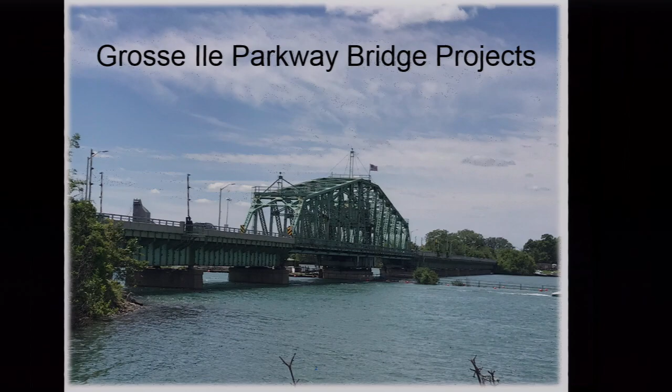So let's go right into Miss Watts' presentation. There is our bridge, the Grosse Ile Parkway Bridge, the Swing Bridge, the Free Bridge, County Bridge 382, our bridge, looking much like it has since it was opened in 1932.

So here is Beverly Watts. We're in constant communication—she is working hard, and she's got a good staff. You can read her statement as well as I can: trying to get this done as seamlessly, as quickly, and as safely as possible.

So we'll go through the slides of the purpose. Obviously background, information on the Parkway Bridge over the Trenton Channel and the Grosse Ile Parkway Bridge over West River Road—both are going to be undergoing repair. Overview of both projects and the scope of the work, and discussion of bridge project timelines and what the next steps will be.

So here's your background: Grosse Ile Parkway Bridge, 90 years old, essentially opened as a vehicular traffic bridge in 1932. Most of you know previously it was a railroad bridge built by the Canada Southern Railroad Bridge Company, an offshoot of the Canada Southern Railroad, built in 1873. So some of the bridge's footings are from 1873—it's been there quite a while. Original expectancy was 50 years; obviously we've outlived that.

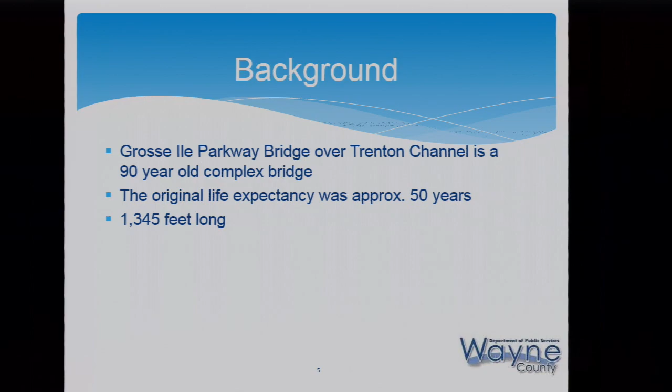And it's just over a quarter-mile long, currently listed poor by National Bridge Inspection Standards. Repairs were done in November—we all remember that. Some of the steel beam plates, the floor beams, were reinforced. Some, I believe, were replaced, and some were reinforced to get the bridge back open again.

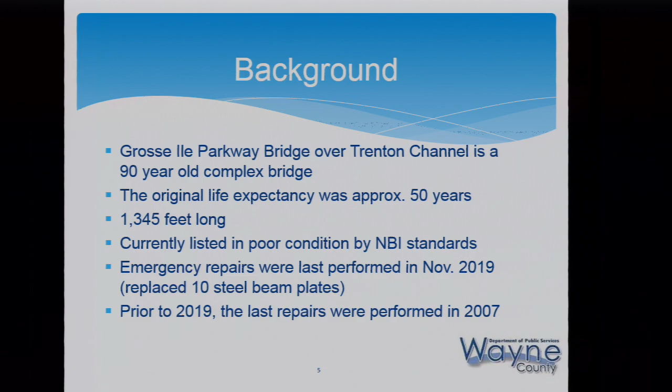And the last repairs—many of us remember—it was closed from May through December in 2007, where much of the decking was replaced. So, scope of the work.

Two phases: the structural steel rehabilitation, that contract's been let. The contractor is already starting fabrication and acquiring materials. And then the last is a future phase, the bridge foundation repair.

Half of the bridge foundation piers were original to the railroad bridge—what we call the even-numbered ones. The ones you can see that depress a little bit as you cross the bridge have been there since 1873; they have settled a bit. The ones the county put in when it was converted to a vehicle bridge went down to bedrock—those have not budged.

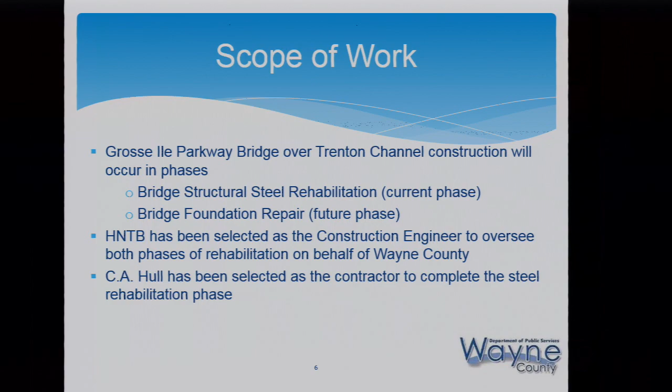So HNTB—there's going to be a lot of initials here—is the construction engineer overseeing both phases, the steel and the piers, working for the county. And CA Hull, one of the best bridge engineering companies in the world, is the contractor to complete the steel rehabilitation phase.

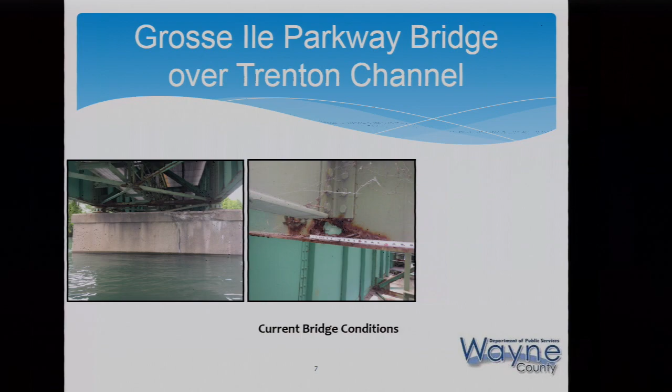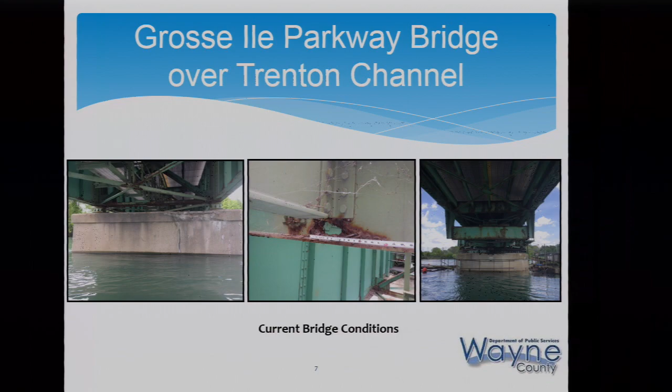So there'll be some pictures here of current bridge conditions, the Parkway Bridge, the swing bridge over the Trenton Channel. This picture shows one of the piers—see a little deterioration of the pier. The next pictures show the corrosion that's happening; that's a floor beam where it intersects the side girders. And this is a view of the pedestal where the bridge's swing portion actually articulates upon—that is Pier 9. Some more pictures.

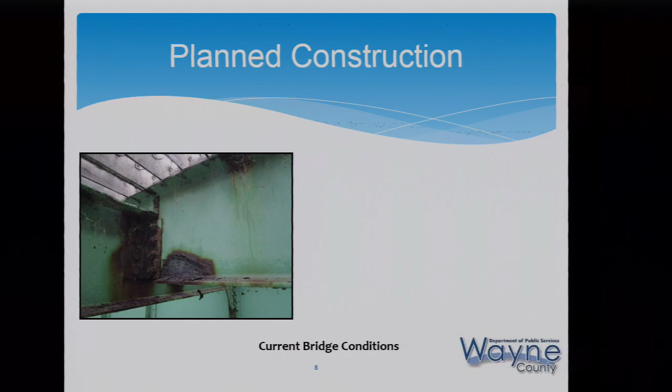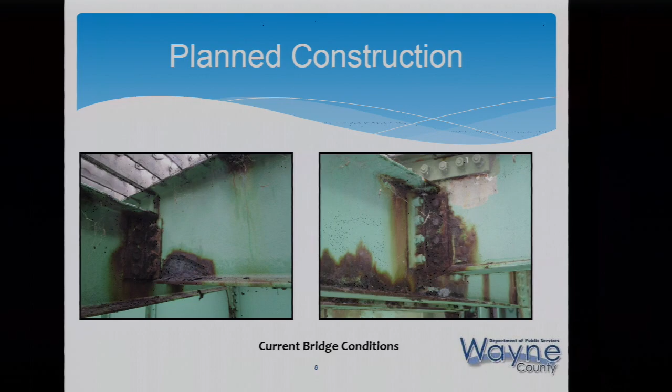You can see corrosion where this stringer beam is bolted to a floor beam. You can see the decking above and the corrosion that's occurred over the years. Another picture, very similar. Again, this is a stringer bolted to a floor beam.

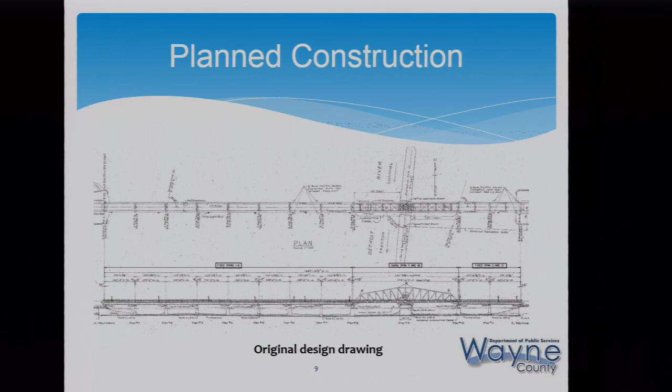The bridge was entirely a truss bridge with half the piers it has now. When it was converted to a vehicle bridge, the trusses were removed, but the piers had to be doubled. The ones the county put in during 1930-31 go down to bedrock. The original railroad piers are not quite that substantial, so there will be work done on that.

Now the good stuff, the timeline. This is probably the most important part to most of us. The structural steel rehabilitation phase, we'll go through that first. And there's your time, starting with the bid letting in January through anticipated reopening in December of 2020. Right now the contractor is assembling materials, doing some prefabrication, and getting ready to start mobilizing.

We'll step down to the foundation rehabilitation phase, the piers—actually the even-numbered piers that will need rehabilitation. There's the timeline on that. That work should be going on. The goal is to get that work going concurrently while they're doing the steel from above. There will be pier reinforcement work going on below.

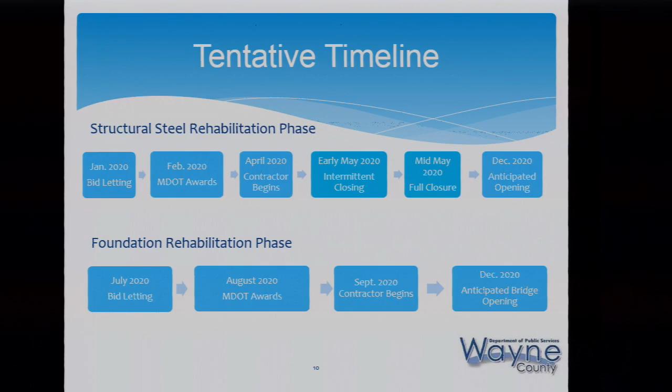That's the county's goal. The next portion, the West River Road overpass—there's the bridge, some background information on that. It doesn't look like that now. So again, we'll start with the background.

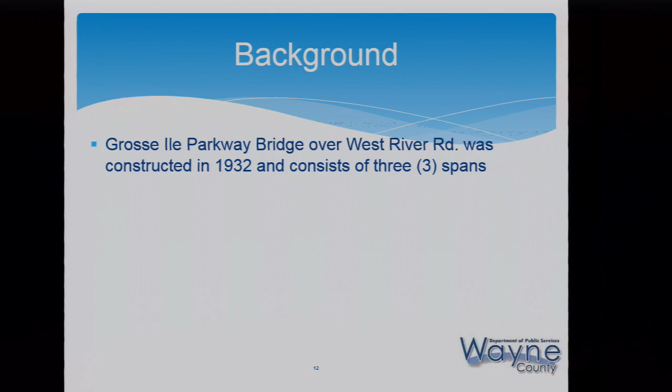Parkway Bridge over West River Road was constructed in 1932. When the rail bridge was removed, a vehicular bridge replaced it. So this bridge has been in place since 1932. As many of the bridges in the township are, it's a Works Progress Administration project from that Depression era, where a lot of the infrastructure in this country was built. We still have bridges remaining from that. It's 95 feet long, 35 wide.

Repairs were done in 1995, and you can read as well as I can: substructure to span in the middle, replace the deck and the railings. The railings used to be a good deal more ornate, as were most of the projects from the Depression era.

As we all know, two temporary steel supports were placed beneath span number 2 to compensate for the deterioration. I was under there with Kevin Gunn, and he pointed out where there were problems with the dapped end Bridge. He was adamant that those steel supports had to stay, and please don't anybody touch them.

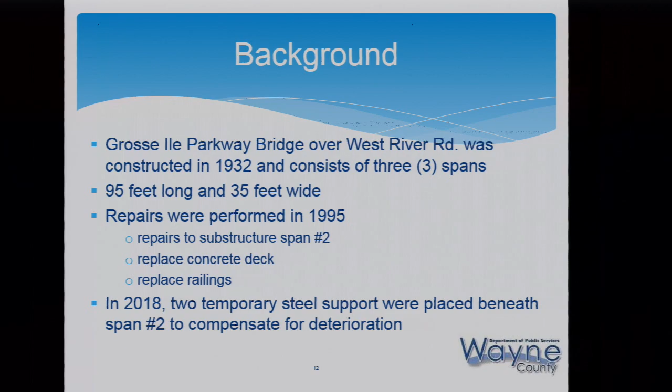Which is why we've blocked it off to vehicular traffic. They did not want any chance of vehicle contact with those supports, or they would have to close the bridge completely.

Again, scope of work coordinated with the rehab of the Grosse Ile Bridge over the Trenton Channel. Obviously it makes perfect sense to all of us—if you're going to have the steel portion of the bridge over the Trenton Channel worked on, let's get them both fixed at the same time. It doesn't do us any good to fix the span over the channel but have the West River Road overpass closed. So they're going to be run concurrently.

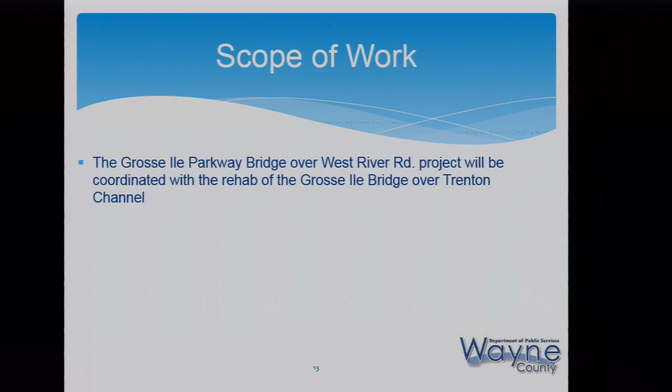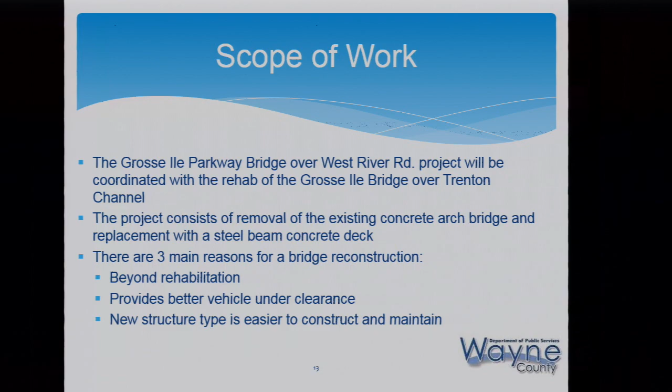They'll be removing the existing concrete arch bridge and replacing it with a steel beam concrete deck. Three main reasons: the existing bridge was deemed beyond rehabilitation, the steel beam will have better vehicle clearance—you won't have vehicles stuck under there like I've seen—you'll have a more consistent clearance, and it's easier to construct and maintain with new techniques.

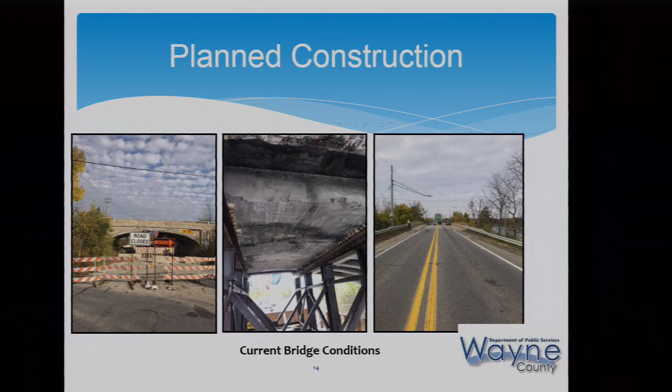So, current bridge conditions and planned construction—that's what we see today. That is what it looks like underneath, and the closer you get, the scarier it gets. And that's just an overhead shot looking westbound towards Trenton.

So they're going to use the same technique as the Lilley Bridge. There is our bridge—you can see some of the separation of the pavement and the changes. Just leave the rest to your imagination. It's going to be a much more modern look, and that's the construction technique they're going to use. That's what our bridge will most likely end up looking like.

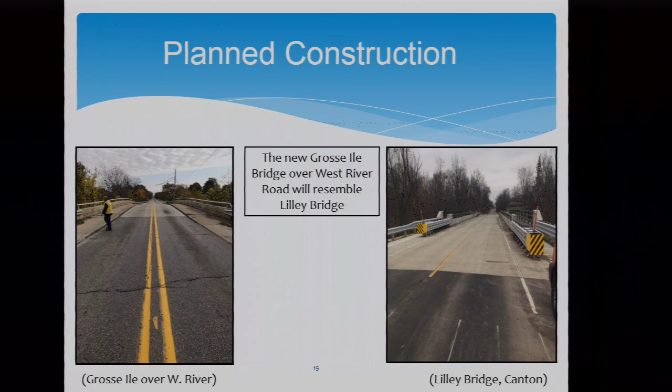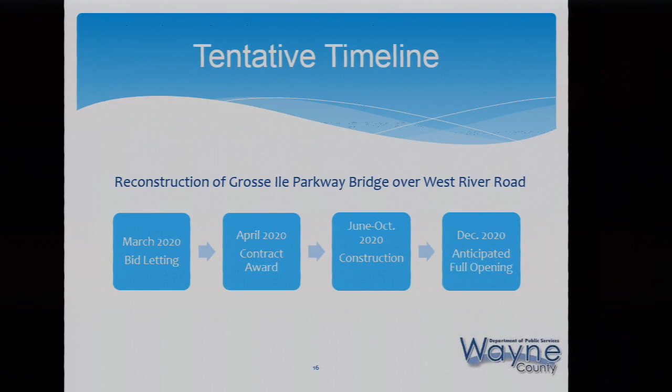So again, the timeline on that bridge—essentially running concurrent with the repairs of the Grosse Ile Parkway Bridge.

Next steps: finalized plans, bid letting for the foundation rehabilitation phase—that's ongoing. Mobilization, April—that is today. This is April 1st.

We're expecting another closure for inspection—the one-day closures, usually on Thursdays from 9 to 3, to get the reach all in, to get the last shots, the elevation shots, the hopefully-lack-of-movement shots, inspection on the old railroad piers, the ones from 1873. That may or may not happen. When we do know if they'll do the inspection, we will of course get that information out on Grosse Ile Connect, so you can plan your day around that.

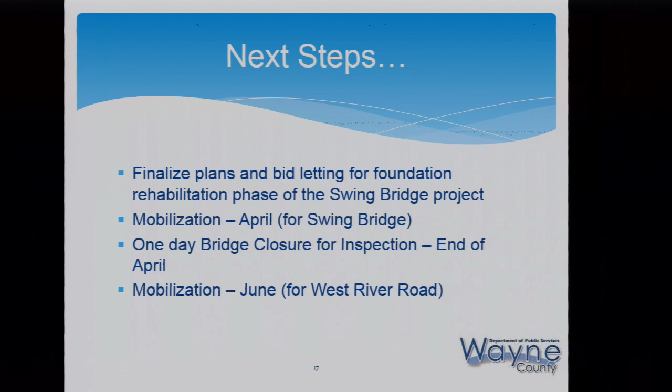And again, mobilization in June for West River Road. The Parkway Bridge will already be closed at that point, so I think that will be irrelevant to most.

And the questions you provided to Grosse Ile Township—as you recall, we opened up an opportunity for email questions, and many of you did offer questions, and they've attempted to answer all of them. I'm going to cycle through them without comment. You can read them, and if you want, you can review this at your leisure and get the answers. So I'll just step through.

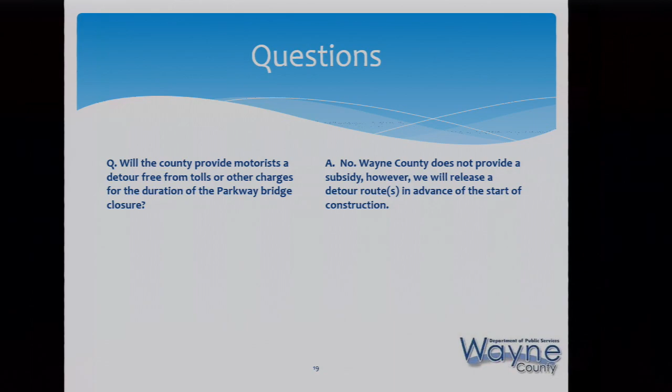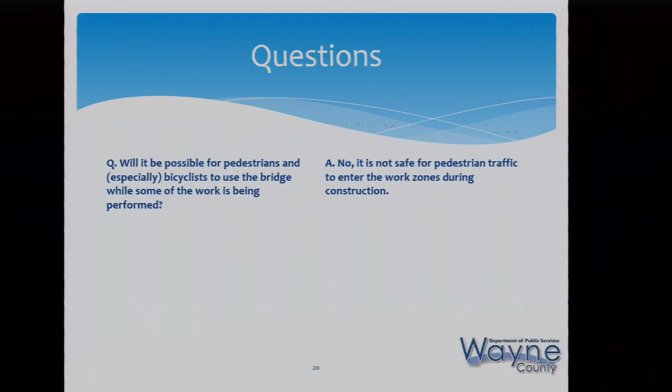By saying it's not safe, once a floor beam comes up, the entire width of the bridge is closed. The deck comes off, the stringers come off, the floor beams come off. It's just a hole, so it's not going to be safe riding a bicycle or walking across that.

This has been an interesting concern. The bridge still has to swing. It still has to be available for maritime navigation. There will be periods of time, though, when it cannot be swung. That will be noticed to mariners. We will also be posting that on Grosse Ile Connect on the websites. We'll get the information out to you boaters as quickly as possible. But for the most part, the swing portion of the bridge will be swinging on schedule. We'll go back to the 15 and 45 schedule if it's going to be open.

And for others of you, when they're working under the bridge, there will be a lot of understructure work. You will not be allowed to bring boats under those sections. We'll have those marked off to preclude you from going under, but portions will always be open unless we note it closed for construction.

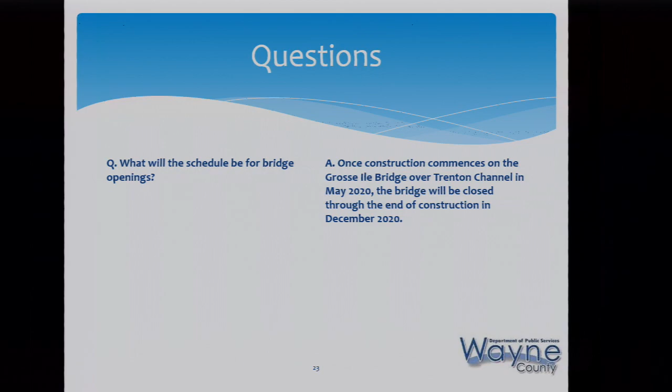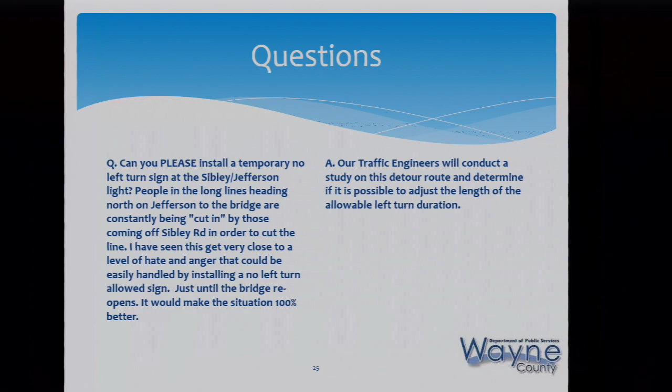Hopefully we'll get some help with traffic control. I know Chief Warnick is in communication with Riverview and Trenton law enforcement for traffic control. We're going to try to make this as painless as possible, but there will be delays, at least initially.

And it was my plea, please do not start any construction on Jefferson in this area. To have a lane removed or have traffic detours there while we're all using the Grosse Ile toll bridge would just be mayhem. So there will not be, unless it's emergency, any construction on Jefferson in the vicinity of Bridge Road. Yes, it's rough, but it's open.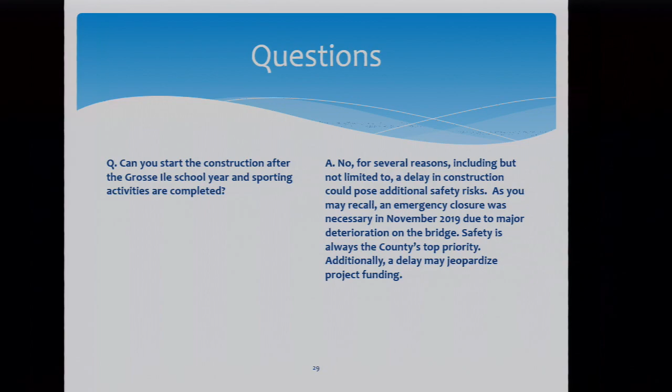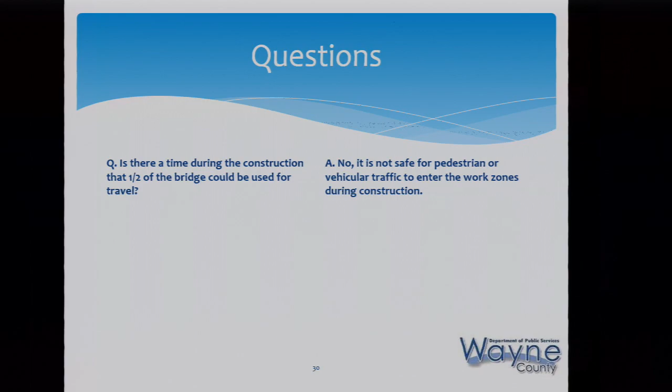As I said earlier, once they start pulling up portions of the bridge, it's just no longer a bridge.

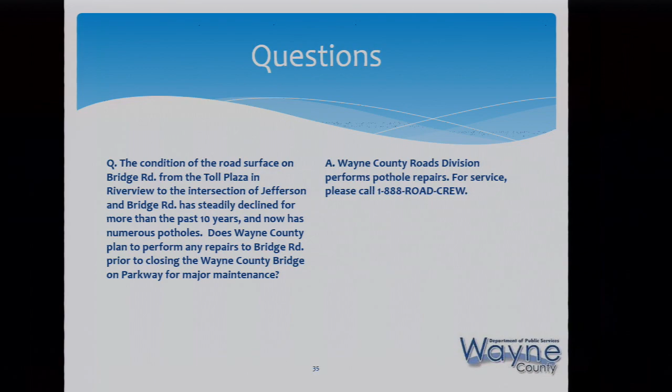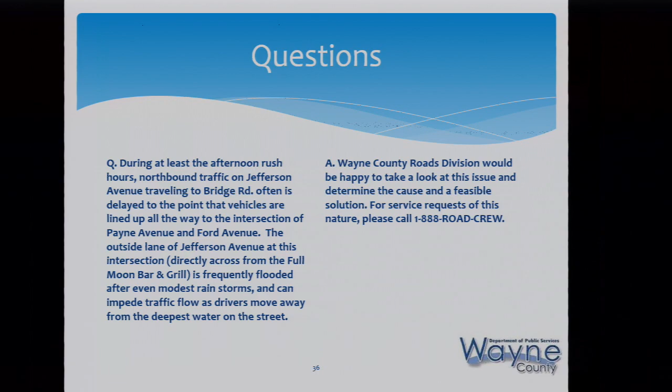We are looking at additional signage on Jefferson to direct those with the bridge passes, hopefully most or all of you, to stay in the very far right lane, because that will be the lane available to bridge pass holders. Much easier to get across, very little delays. So again, I hope all of you have your bridge passes. Mr. Smoke has added new signage at his bridge to make it obvious what lane you should be in, but we're going to add some signage on Jefferson to hopefully get you in the right lane as soon as possible to make your crossing as smooth as possible.

Again, back to the Coast Guard restriction on marine vessels. I've been talking with our new rep at DTE on coal barge schedules. She's going to get the information to me. We'll coordinate that with the Coast Guard, with the construction on the bridge, and with the toll bridge. So if any coal barges or freighters have to make deliveries down to the DTE plant, the Trenton Channel Power Plant, there will be as little disruption on the toll bridge as possible, and on the work to the swing bridge.

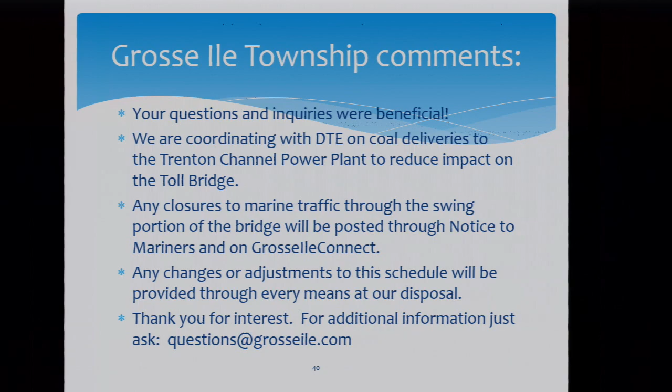My closing comments: thank you for your questions and inquiries. If you had a question, hopefully your neighbors had the same questions, and most were answered. Again, we're coordinating on the coal deliveries. Closures to marine traffic will be posted. We will let you know by every means possible. Again, the vessel masters are responsible for obtaining this knowledge. If you're in charge of the boat, you're in charge of knowing where you can and cannot safely go. We will post any changes to the schedule. And again, if you have more questions for us, or for Wayne County DPS, we have the question email open, questions@grosseal.com. We'll check them regularly and get them answered as soon as possible.